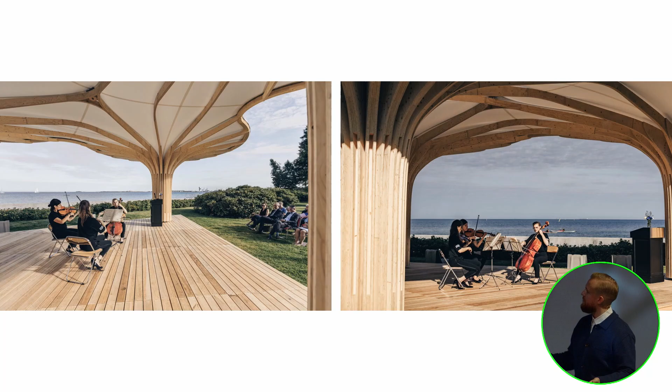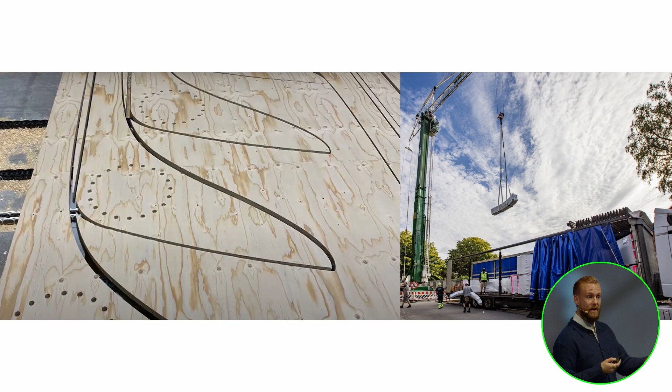An example of this is a recent pavilion that we've just completed for the Swiss Embassy in Denmark, where the project brief was not only about trying to create a pavilion that captured the amazing sights of this location, as well as providing an event space for the many things that the embassy tries to hold in it, but also a way for us to experiment with new digital fabrication techniques, and ways of manufacturing to ship it there so that it can be assembled on site.

Easily, as well as being disassembled, so that we can embody these new biomaterials into our way of working. The second pillar of JAJA is transformation.

And that's because we believe in any project, it doesn't matter if it's a master plan for a new urban area or a building, is that if there's an existing building there, as much as we can, we try and retain it and recreate it within our project. And that's not only because of the climate change aspects.

We want to try and preserve as much material as we can, but also there are unique spatial opportunities that you get in these types of buildings. Depending on the age, they have very unique characteristics in terms of construction, and we don't see that so much anymore. So it's important to try and preserve this as much as we can in the future.

An example of the transformations that we're doing, and one that I think is insanely cool, is we're currently renovating Denmark's oldest castle. It's called Nyborg Slot. As well as the renovation of the existing castle, we're actually putting on an addition to it, which in some ways is an addition because it's a new museum, but in another way it's actually just bringing back the existing gantry wall that used to be a part of this castle.

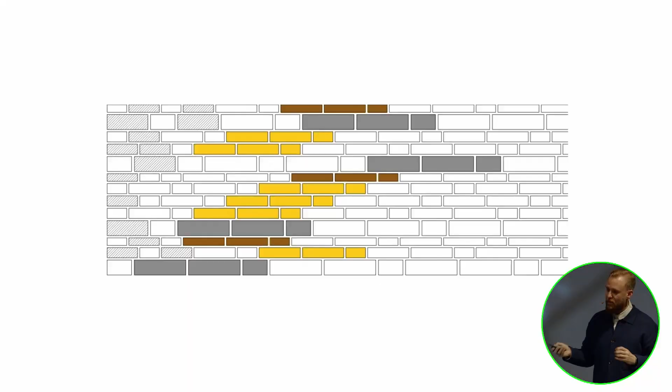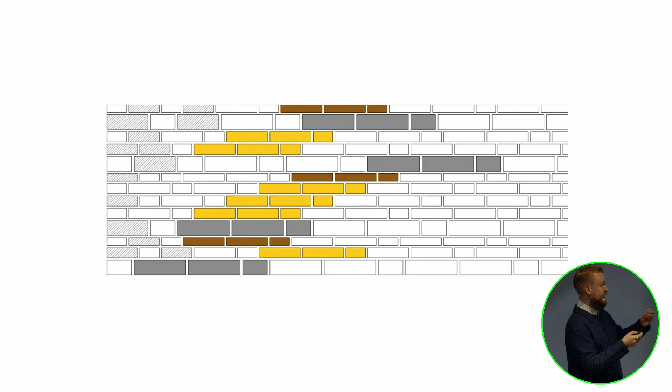One of the challenges for us is how to integrate a new building into this existing context, especially when putting in new bricks, because in some ways we want to preserve that kind of randomness we get in the existing building, but we also need a construction method that our bricklayers can actually follow and use.

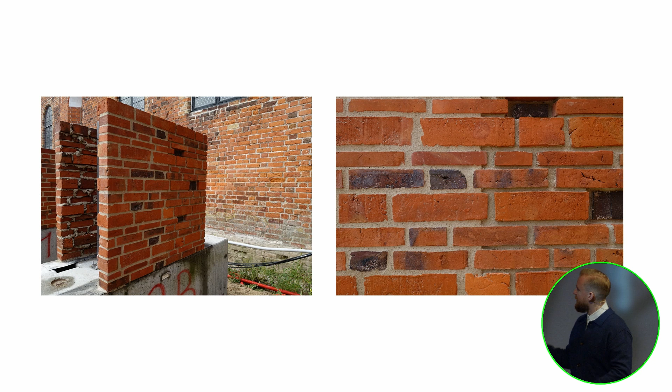So we've been using parametric tools to make these different patterns so that they appear random while still integrating into the existing brick facade. This is hopefully going to come together into a beautifully carved out gantry wall that preserves the characteristic of the old while providing a new characteristic and a new type of architecture.

Okay, the final pillar of JAJA, and one that's close to my heart as the head of mobility, is mobility. I think it's actually a bit weird for an architect to be involved with mobility. It's not really the traditional domain that architects get into.

For those of you questioning what mobility is, for the past 100 years or so, it's been this, the car. If anyone thinks of transportation, they generally think of this, because it's how we move around the world.

And that's not to say it hasn't had positive benefits. Especially over the last 100 years, we've had amazing social and economic opportunities as a society because of the car. The only problem is those initial ideas of independence, of being able to get around, once they hit the mass population and we started redesigning cities to allow ever more cars, it got to a point where you couldn't exist in a city without a car, which is really bad.

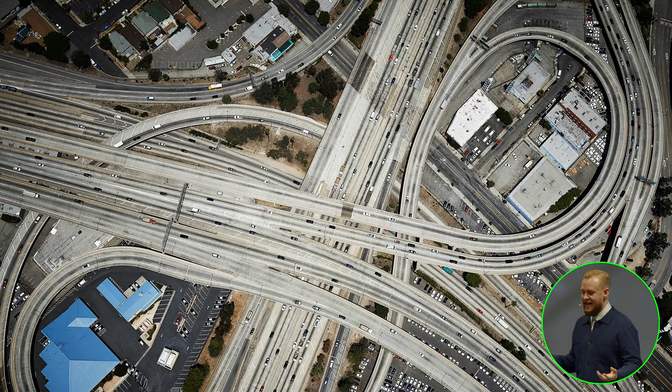As an architect, why I find this incredibly sad is because of the spatial impact these transportation choices have on our built environment. We all know these roads, the way they splinter our urban territories, or even in the case of Prague, the middle of your downtown, you just have this highway cutting through it.

I'm sure it helps people get around, but when you have the National Museum, where you can't actually cross the road at points to get to it because of these ever-expanding lanes of cars, it just gets a little bit sad, right?

The cool thing is, and where a lot of JAJA's thoughts have come over, say, the last 5 years, is we seem to be at this paradigm shift in the way we move through cities and the way we conceive of mobility. In some sense it's come through technological advancements, things like autonomous vehicles, electric cars, but it's also come through the emergence of micromobility.

3 years ago we didn't have electric scooters, and now they're up to hundreds of millions of rides globally. It's not just about personal mobility, but you're seeing these types of vehicles, especially in Prague, things like cargo bikes, being used for logistics. In Copenhagen, you see parents delivering their kids to school on them. It's this crazy new category of transportation coming about.

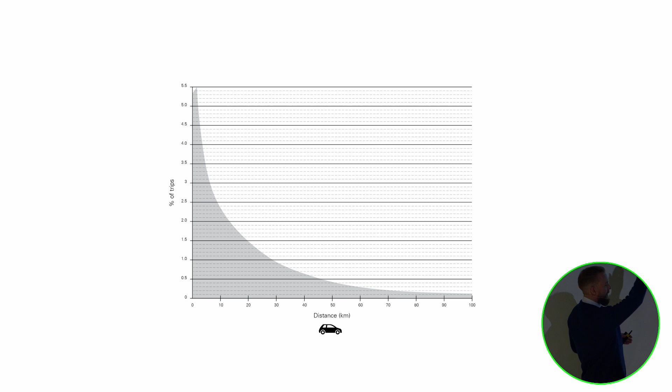And the way you read it is that the bottom axis is the distance, and the side axis is how many trips there are. The world over, the majority of trips are under 10 kilometers. The majority of them are under 5 kilometers.

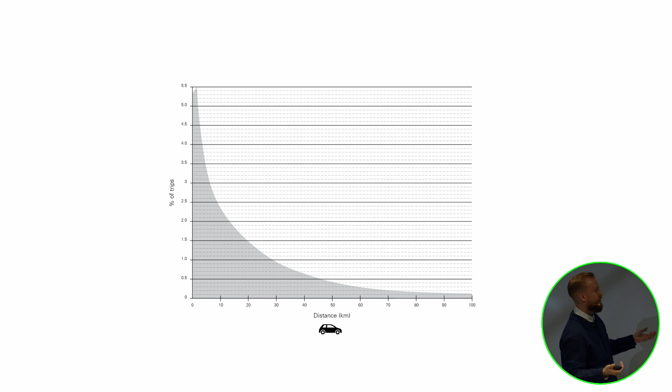An insane amount of trips are under 2 kilometers every day, and yet we buy these cars to service them. It doesn't matter if we're just going to the shops, which we could easily walk to, or driving to another country in Europe. We have this car that's designed for all these trips, which means they make sense for some, but not for a lot of others.

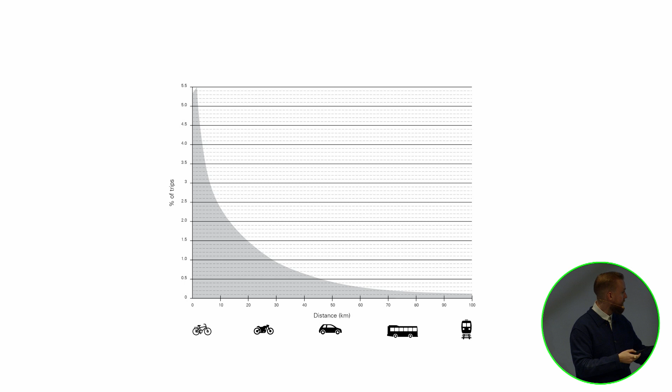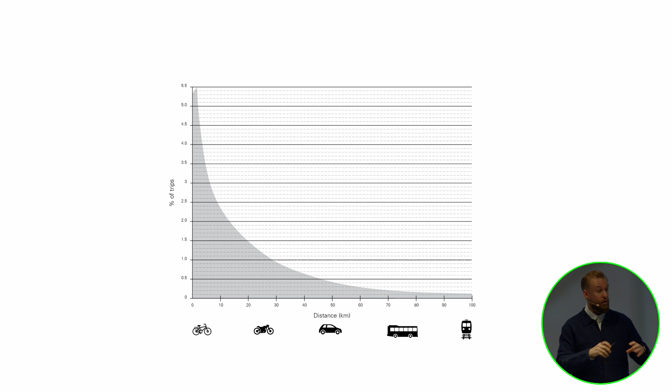But the thing is, when we start unbundling that mobility package, where we have apps that allow us to pick, you know, to have a bicycle if I want to ride 2 kilometers across the city, or a share car if I want to drive to another city in the same country, you can start picking the right mobility choice for that journey. And what that means is we have an overall better, more efficient transportation system.

So it's never about replacing the car one-to-one. This is the kind of discussion where we hear, you know, my bicycle can't do all these crazy things with the car, or the bus doesn't go where I need it to. It's not about these one-to-one kind of replacements of the vehicle, but rather the chaining of all different types of mobility options that are actually able to release us from this burden of private car ownership.

And I get that that was a little bit confusing, and to talk to the general public about this is extremely hard, because if you even mention removing a single car park, or that you might restrict vehicle access in any way, you kind of divide people into two groups: those that love cars and those that hate them. And if we're going to move forward as a democracy, we need to find a middle ground.

And that's why we've been developing this communication tool called the mobility pyramid, to try and broaden the discussion beyond cars or no cars, but rather maybe a little bit of cars and a lot of walking and cycling, and then a little bit of public transportation as well.

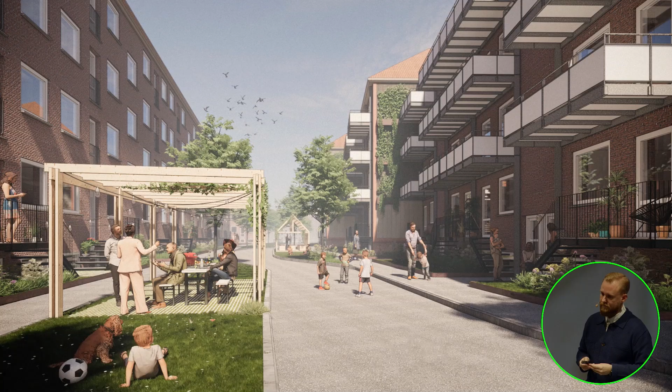We also do pilot projects. This one is in the northern Danish city of Aalborg, where we've taken 90% of the parking away for a year and put in new social functions. That's just to test, right? Is this something residents are willing to give up their parking place right outside their house for?

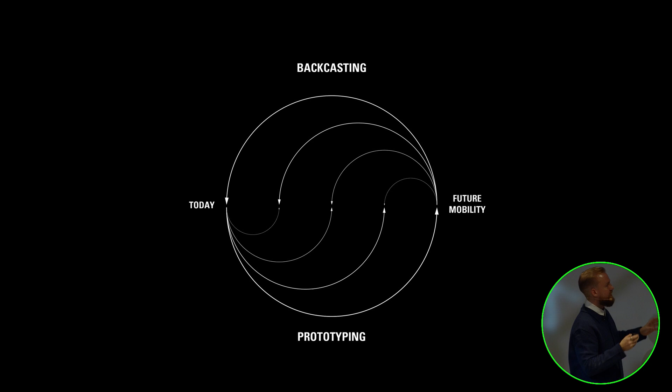So now you can see where the combination of backcasting and prototyping come in, in this kind of yin and yang diagram, where the backcasting and visioning guides our work today, setting the agenda. But the prototyping takes it and gives us the knowledge to re-inform that vision. So it's not a static thing. We're learning every day, becoming more clever, and hopefully making better inroads to actually get to that future step.

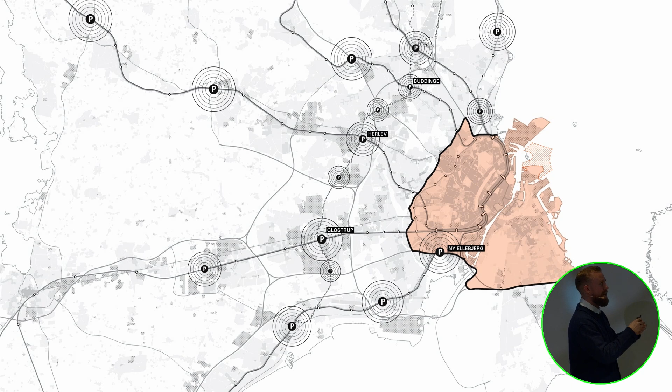At JAJA, what we've been working with is a large-scale strategy, on one hand, to really try and exclude cars from this highlighted red area. But because we can't just create a line and say this is where cars are and this is where they can't, because you're just going to push the problem out to the neighboring suburbs, there are also micro strategies in all the surrounding suburbs so that they can become their own little car-free areas as well, and make shifts to more sustainable mobility choices.

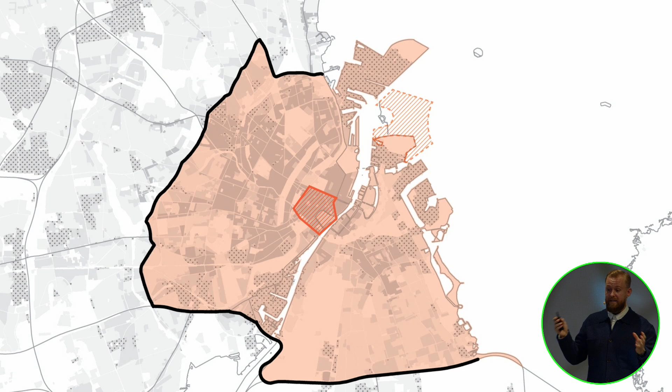So if we start with this overall plan, we're going to zoom in to just this area. For the next couple slides, I'm just going to jump through some explanatory diagrams to explain this. The way Copenhagen's set up right now, just like Prague, is you have these roads that cut through the medieval city center—I'm talking like 7 lanes. It's crazy. It's not how we should be treating this space.

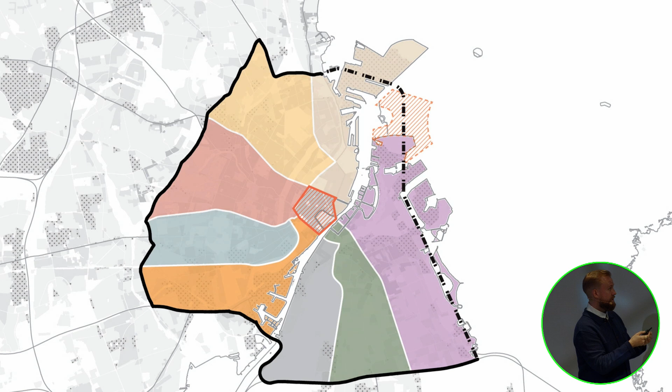So one of the strategies we've been looking at to cut this is to implement a strategy called traffic islands. Any of you in transport might know this from the Belgian city of Ghent. Essentially what the strategy does is divide the city into different zones where cars aren't actually able to drive across them. So you can drive into a zone if you need to get somewhere, but you shouldn't be driving across these zones for trips that could otherwise be made by other choices, right?

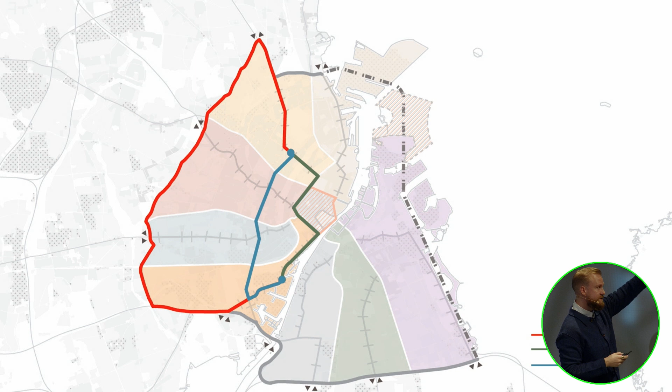To give you an example, you can see here that if you're a car, the red, you would have to leave the zone and come back in and come out. Whereas for bicycles or public transportation, you can just cut through them. So what that's doing is encouraging more sustainable modes because it's the easiest option, while still not excluding cars for those that really need them. It's this way of balancing the priority.

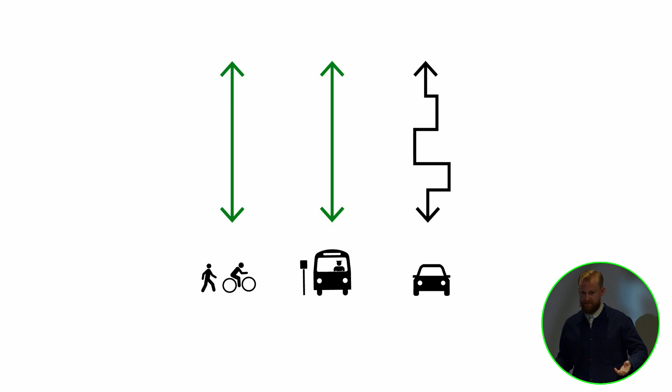In Ghent, this has been extremely successful—they've seen massive reductions in car ownership, people adopting shared cars, and an increase in public transportation, as well as a city that isn't full of parked cars everywhere. But if you're taking mobility options away from people, you also need to provide them with an alternative. It's not simply about taking away cars; you need to provide something else in the same measure. And this was probably a big jump for a lot of people.

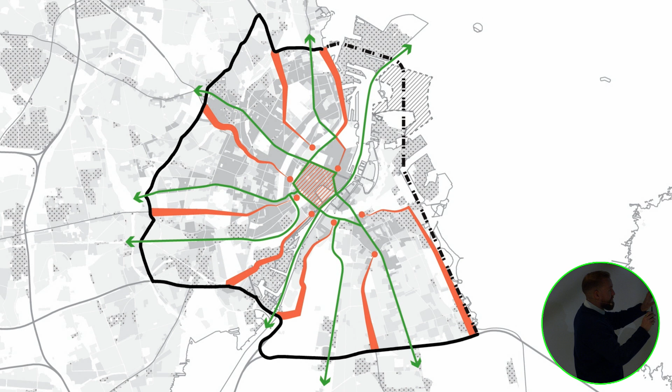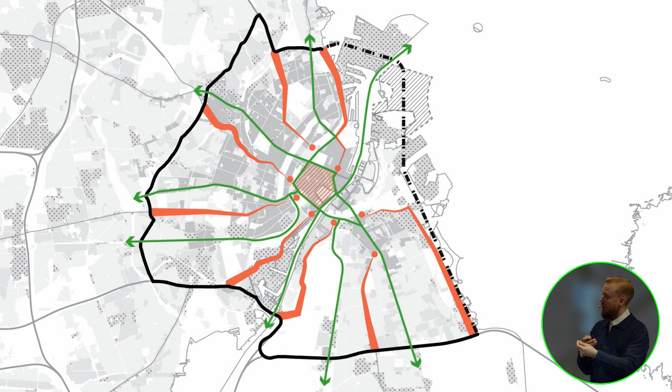Those big red roads I mentioned before, the ones cutting through the city center—what we're proposing is that every second one of those becomes what we call a super boulevard, a high-capacity corridor for public transportation and shared modes of mobility. These green roads really function well because you don't have cars cutting across these traffic islands anymore, so all those intersections on the big roads that were slowing down capacity get freed up to allow this transportation to go through.

To give you an example of this, you can see in the top section of the existing layout where you have 7 lanes of traffic, parking on either side, and then a distribution road to allow that.

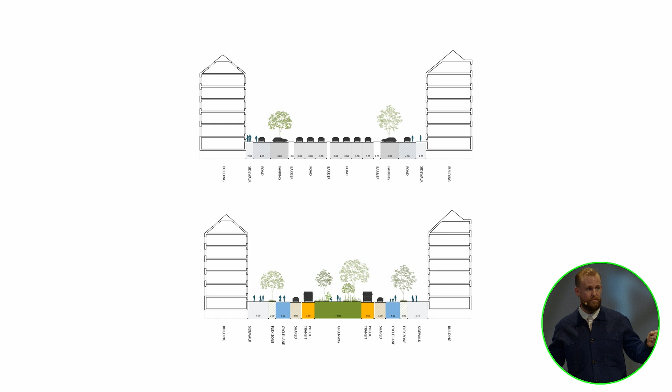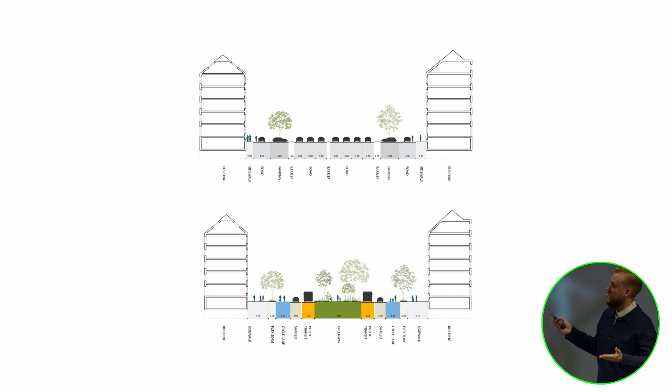That gets condensed into a transit way of either a bus or tram, a shared mobility lane for buses, shuttles, taxis, and then an extended cycle lane to allow more throughput for bikes.

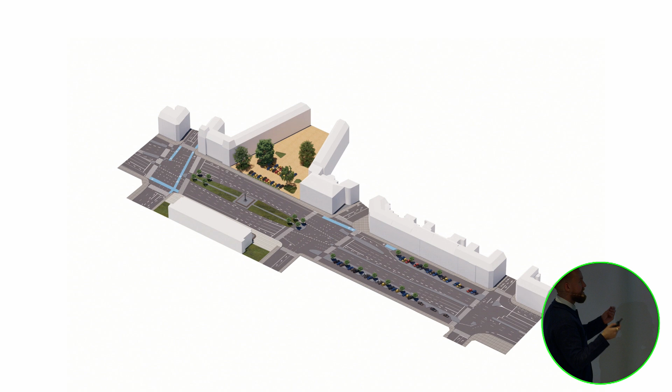This is crazy. This is like the central cultural axis in Copenhagen where you have a number of museums. What this does is take this kind of highway that cuts through the city and transforms it into a new public space, where you still allow mobility in some sense, but actually provide these new corridors of green infrastructure that increase the amenity for pedestrians and the people who live there.

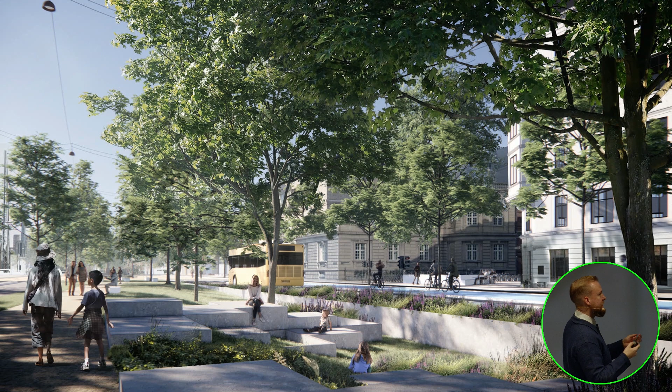It's really hard in Copenhagen because we have so much asphalt that when it rains too heavy, it floods the city because it can't be absorbed anywhere. So we need this kind of infrastructure to absorb all this rainwater.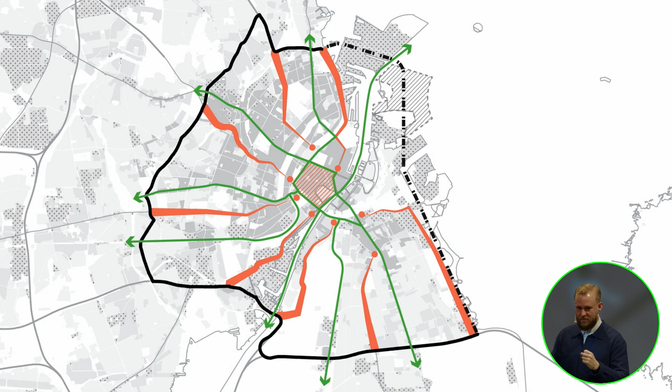But that's not to say we don't think about cars. Unfortunately, even in a car-free strategy, you need to consider car use in some way. That's important because many people rely on it. It's just about thinking how do we do it so it's not the predominant mode that people are at.

Wait, so sorry, if I go back.

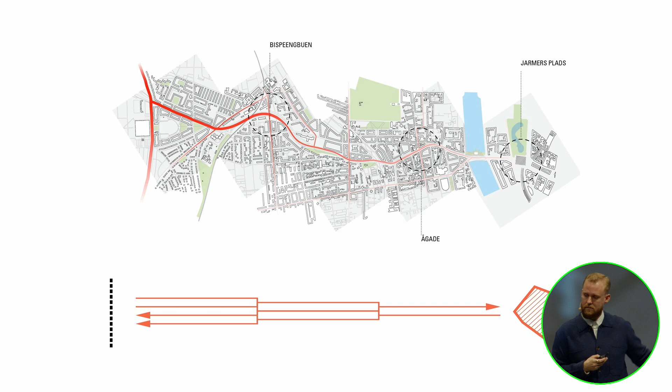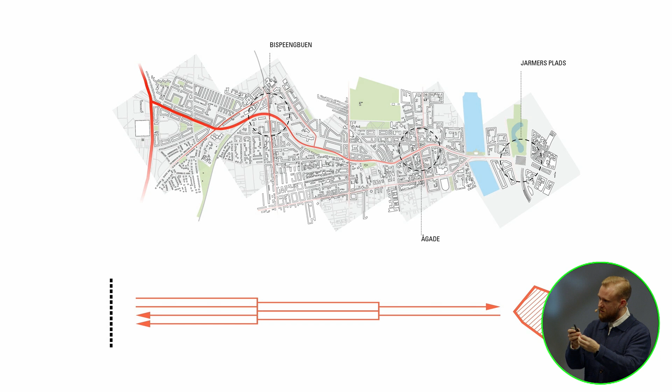Yeah, so these red lines snake in as they're coming towards the city center because people aren't crossing anymore. There's an endpoint where these roads are going to, and that means the capacity of the road, as you go further in, gets smaller and smaller because people are kind of funneling off.

So you can start to reduce the amount of lanes on the road the further you get into the city center, until you eventually hit that kind of stop where you're going left or right.

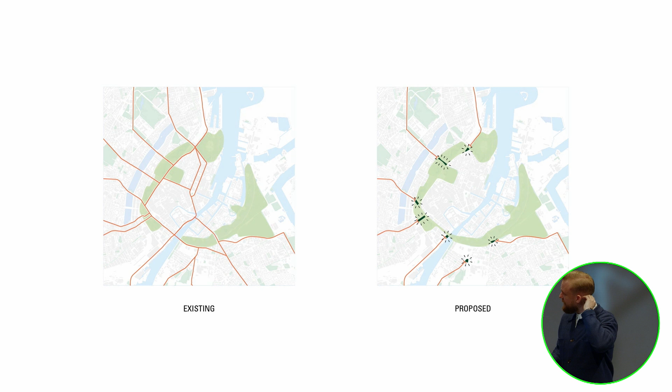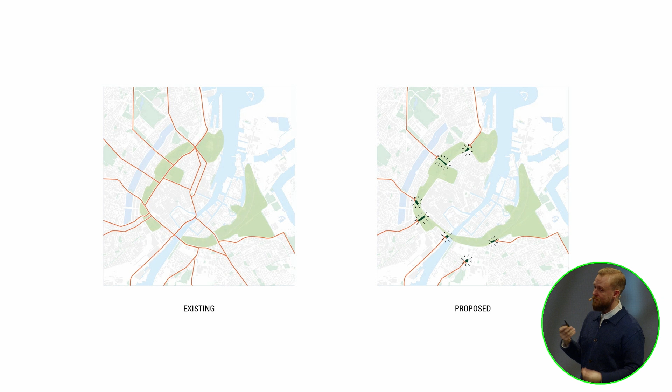What's really cool about this strategy is that these places where the roads are stopping, you can see on the left how they're cutting through the city center and through this historic green fortification that used to run around the city center, these stopping points almost line up exactly with the old green fortification. So you can put in new green urban squares that relink this infrastructure that used to exist.

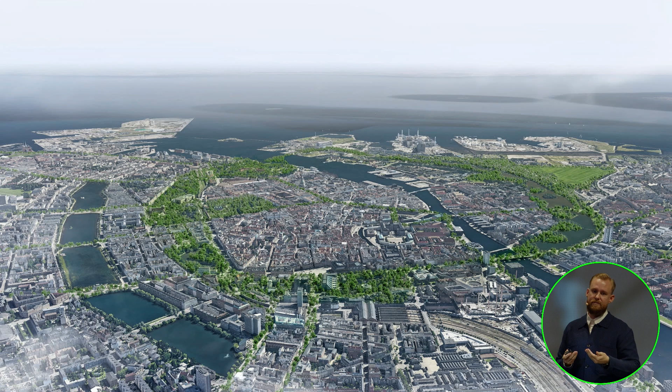In the existing Copenhagen, you can reintroduce these green infrastructures that used to be there. I really like this thought that this discussion isn't just about mobility, it's not just about transport, it's not just about cars, it's about green infrastructure, it's about people, and the many other ways that by rethinking the hierarchy of transportation, we can create better spaces for the city.

This kind of project had two different scales. We've been looking at the arrows on a map and where different things are going. While that's important, it's also really important to consider how this plays out on the human scale.

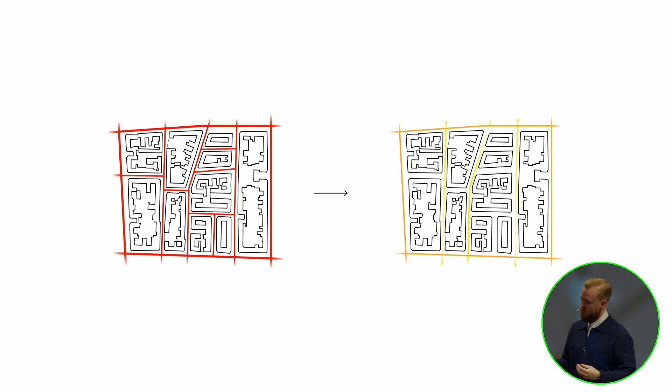I don't know if many of you know the superblock strategy they're developing in Barcelona, where you've got a pretty even grid structure in the city. What they do is make a 3x3 grid people can't drive through, so you can only drive on the perimeter of the grid, but not through the inside.

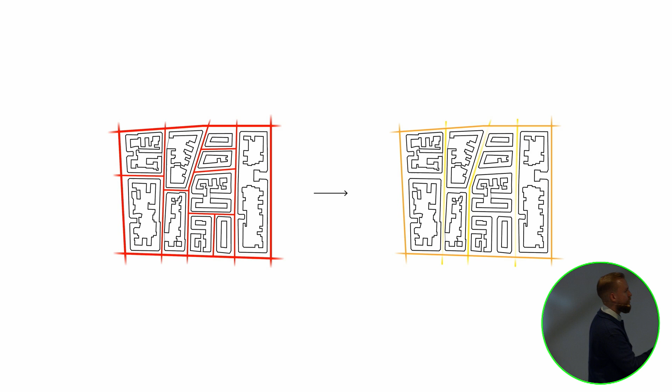We've adopted a similar strategy here in Copenhagen. We don't necessarily have that same urban fabric as Barcelona, but you can still apply these principles, where any cars around these zones can circulate, leaving the inner streets, the living streets, generally free of cars.

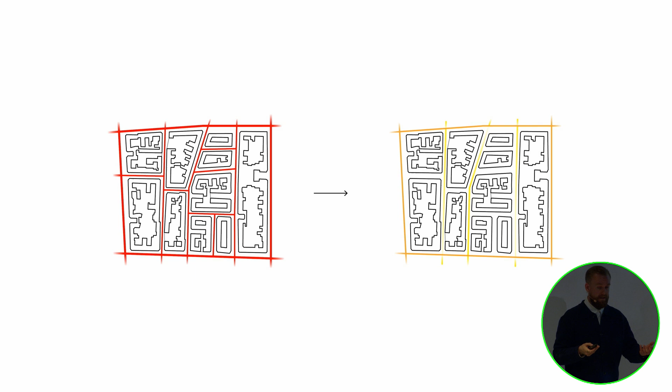To give you a sense of what this looks like at an urban view, you can't necessarily see those grids appearing. But when you apply the principles of the superblock, you can see how circulation happens around the streets, on the bigger roads that can absorb it.

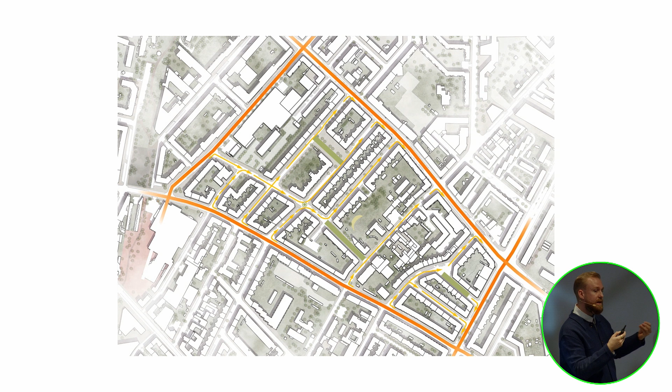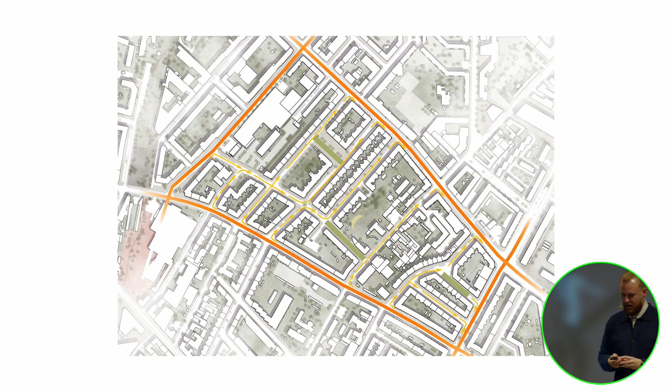While you make the inner streets one way, you can route them in different ways so that you can create more space for other purposes on that street. Now within this strategy, I showed you the green and red streets.

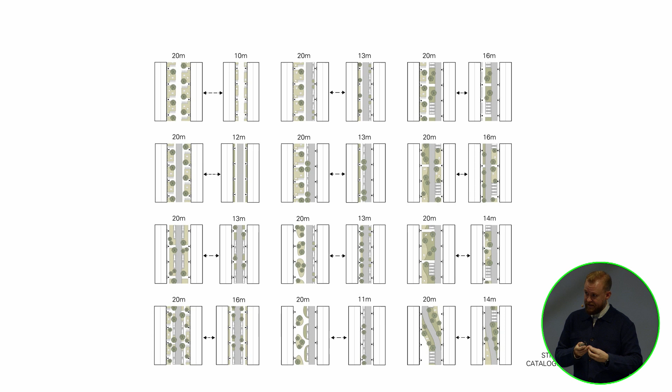There's maybe 16 of them in total, but if we're talking about the living streets in Copenhagen, we're talking about thousands, so you can't really design each one. What we were interested in is developing a catalog of approaches that could be taken to individual streets, varying on street width, orientation, and ground floor functions.

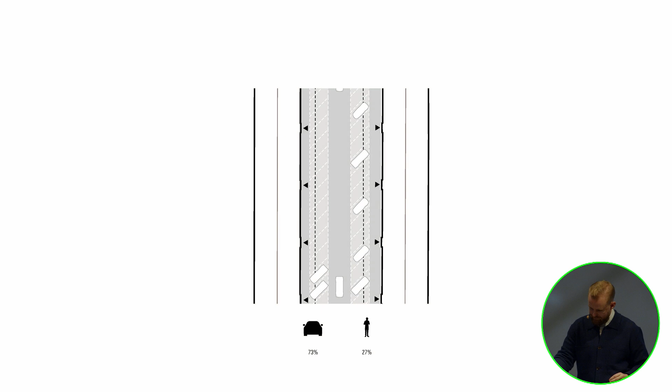I'll step you through one of these proposals to show how you arrive at these streetscapes step by step, and show you the considerations.

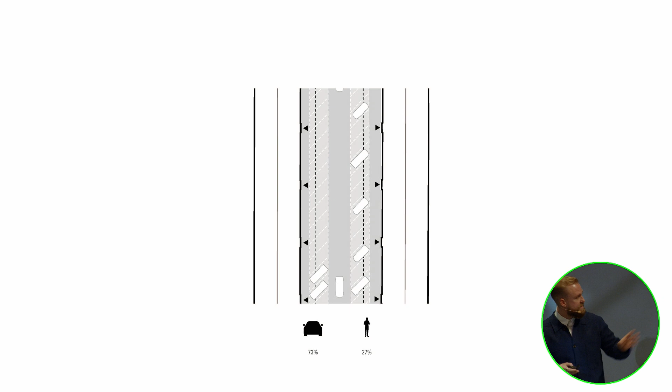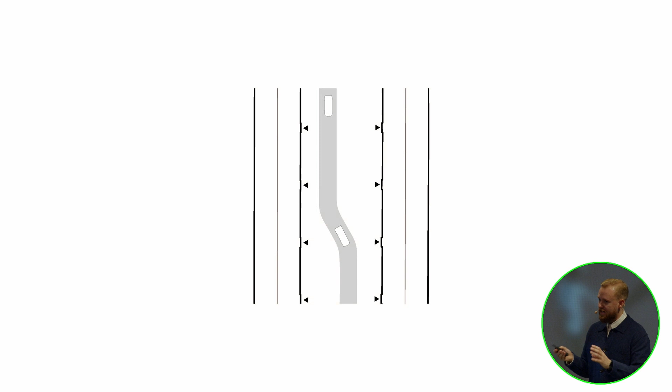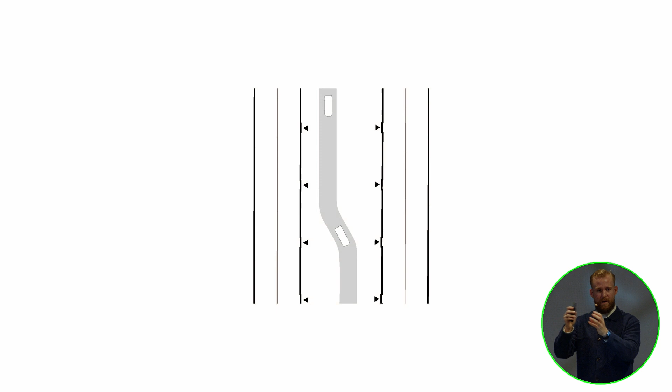So this is the existing street, where the majority of space is given to cars. Our immediate thought, since we're in this new car-free area, is to allow a street in one direction of 5-meter width, allowing a car to travel one way and a bicycle to go either direction. Because it's a shared space with excess room, we start putting bends into the street, which slows cars down naturally, since a variety of users share the space, while also mixing up the space allocation on each side for a more interesting spatial response.

We then allow pick up and drop off, so people can receive deliveries, tradesmen can come to do jobs, elderly parents can visit - we still allow aspects of cars within it. But one of the big moves is to provide gardens to the ground floor apartments, because these are traditionally the least desirable apartments since they don't get as much light or a balcony, so they have no semi-private space.

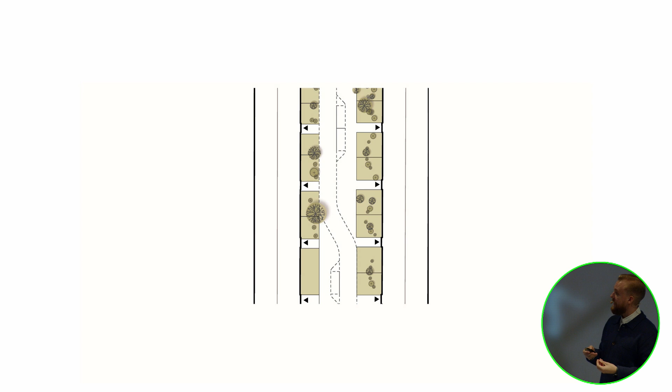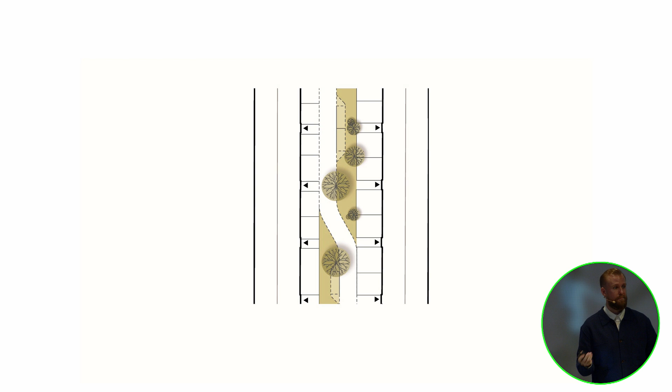These gardens provide an offset giving some semi-private space, and also audio and visual privacy for people no longer walking just outside their apartment window. We also provide new social functions, social amenities, and urban nature into the street, so it's not only for some people but for all people, bringing them out onto the street. These steps turn this from a street for only cars into what we call a living street, with multiple functions existing within it.

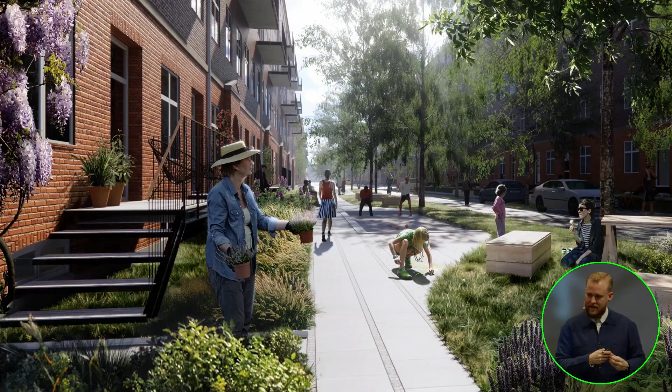And what that does is take this existing street I described before, and we imagine it becoming something like this - where you can see there are still some cars present, but they're not the dominating feature. There's much more space for people to come in, and much more space for green infrastructure.

Primarily, I think these images start to shift the conversation a little bit away from 'do I have to give up my parking space' to 'what do I get if I give up my parking space.' You can start to play with these trade-offs and show people that maybe there's a better use of our public space.

Cool, so now we're up to the second theme, which is from parking house to urban space. This has emerged through a project you probably know of ours - the Konditaget Lüders parking house, the Park and Play, located in the northern harbour, a new urban development in the north of Copenhagen.

If you notice, there's place for trees, place for bicycle parking, because it's all been accumulated within that building. It's a funny little side story that it was built there, because these new residents obviously wanted a car space, and it was designed so it was no more than 200 meters away from the apartments. But because of that little inconvenience and really great public transportation infrastructure and bicycle networks, it's underutilized. It's not full of cars because people have chosen not to buy one even though they have the option to do it.

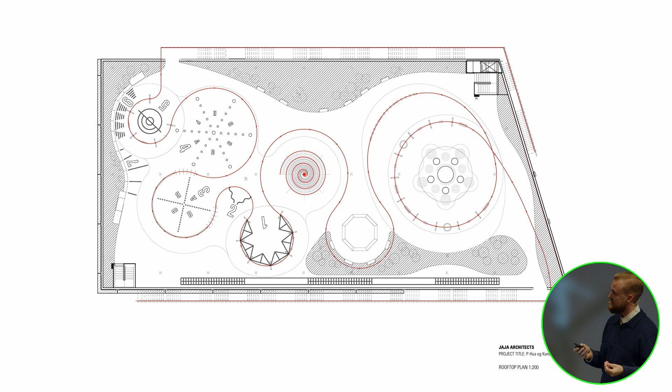It was an interesting project because we were inspired by the kind of red brick and red tile of the existing industrial area before it was transformed into this new urban development. So to continue that red thread, we literally made a red thread that would connect from one side of the building to form a number of different scales of spaces that are recreational for, say, playgrounds, kids with families, urban spaces for visitors, but also recreational facilities for the local CrossFit club.

This red thread, what it did is—this is a public space on top of a car park, six stories above. So you need a way to bring people up to that space. This first element of the red thread was this grand staircase, inspired by the Centre Pompidou in Paris, leading up to the urban space that I think people might know.

You can see here how the red thread is containing and forming all these different uses within it. It's kind of like the framework for the rest of the building to work.

So as I said before, the red thread forms these different types of spaces for all the different user groups, whether that's the CrossFit guys that love it—there's a little timer so you can run up one stair, do all the exercises, and get back down—to all the families and kids, because you don't have playgrounds like you do in other areas, to just people coming and hanging out, getting a coffee and a pastry and enjoying the view.

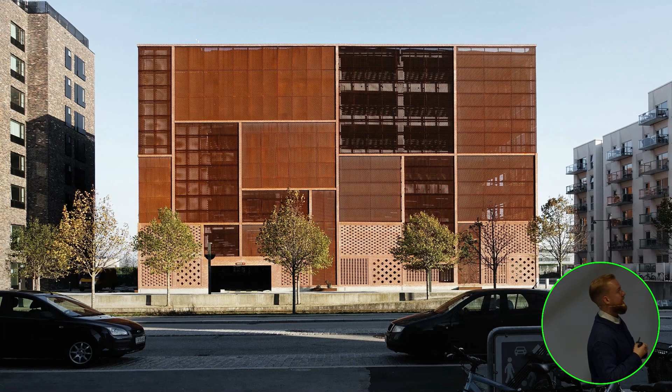The next project is another parking house that we've done, this time in the south of Copenhagen. And while this wasn't so much about creating a rooftop public space, it was about how these kinds of buildings can still provide urban qualities on the ground level.

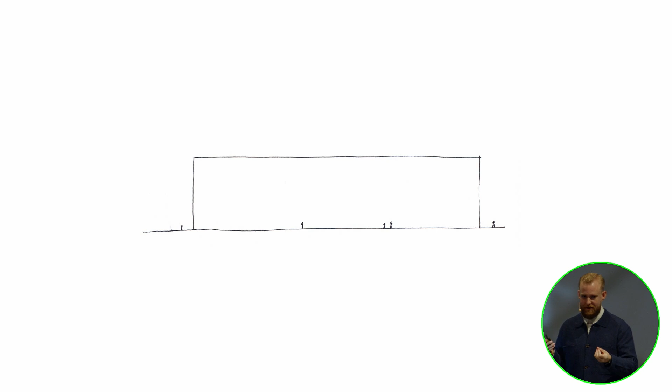A big challenge when designing these types of buildings is that they're essentially one volume with no program. So a lot of our task was how do we break up this giant mass into a human scale that can address people as they're walking along it. We were inspired by the artist Mondrian to produce this very strict grid structure that would dissolve as you move further towards the base.

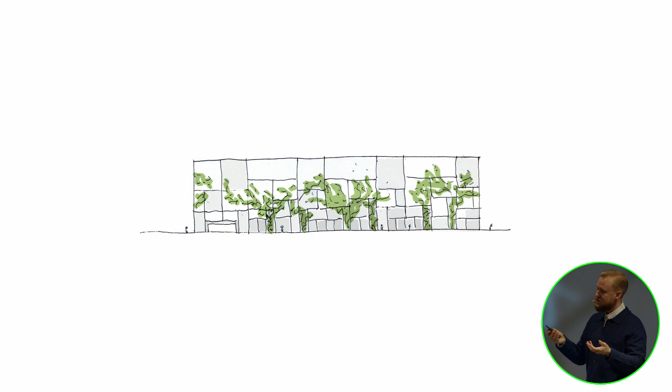On the other side, we were planting these green planters that would rise up, so you'd have this nice intersection of the organic planters rising from the bottom and the strict grid of the facade coming down from the top.

Materially, we kind of separated the building into two functions. We have this plinth, which is addressing the human scale, built out of brick, with various brick patterns that relate to the pattern of the facade. And then as you rise to the top, we have the corten steel with these bigger spaces. What that means is that as you're moving along, this building doesn't feel so big—it actually addresses the human scale quite well.

And the brick actually allows you to carve out different niches to provide maybe not big programs, but important amenities such as benches for people to sit, and little places for you to park your bike. So these buildings should also be contributing in some way to the local surrounding, not just taking away.

The final theme I'm going to talk about plays out with these parking houses. It's been a development, right? Because it might be a bit funny for me to get up here and say we need to get rid of cars, and then show you a lot of parking houses, which is a big part of our work. A very important thing we need to consider is that we have a need today and an ambition for the future, and there's a long transition period between it. I don't expect no cars tomorrow—we need to do this in a sensible manner. So we need to think about how the buildings we're designing today can be flexible enough to still sustainably meet those goals for the future.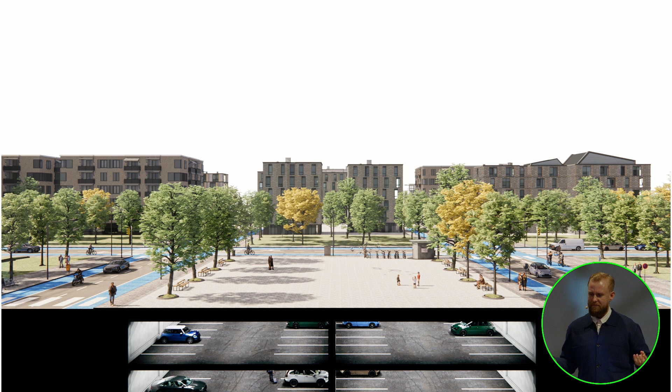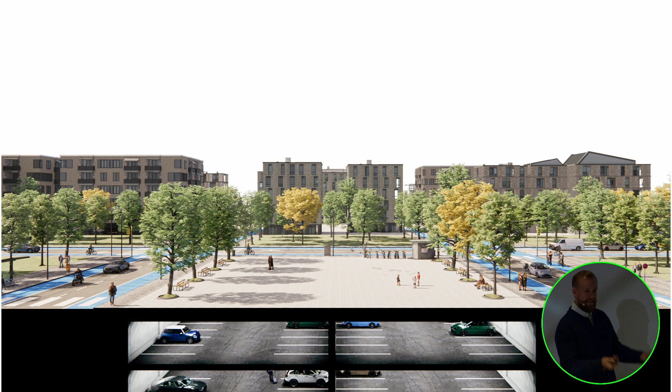So I'll give you a rundown of what I think parking houses are. We have the underground parking basement, which is prevalent in so many new urban developments, because the thinking is: get rid of the cars, and everything looks nice on top. But if we're thinking about this transition, these structures are incredibly unsustainable because they cost a lot, require a lot of energy to build underground, and you have to excavate a huge amount of soil. Afterward, they essentially can't be used for anything else. So if we're changing and moving to other modes of transportation, we're just going to be left with basements everywhere.

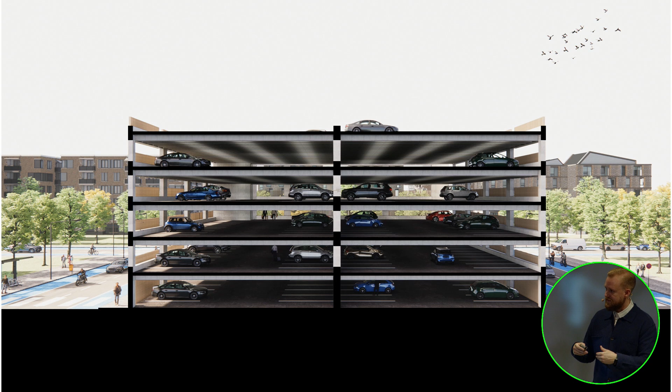The next typology is the above-ground, standard, cheap parking house that you all might know. I'd say it's maybe a little better than the basement, but it's essentially going to be destroyed if we were to change how we move around. With these structures, you have very deep bays and very low floor-to-ceiling heights, so you essentially can't do anything with them—you can't get the daylight required to convert it to another program, and it doesn't give you the space to do anything nice with it.

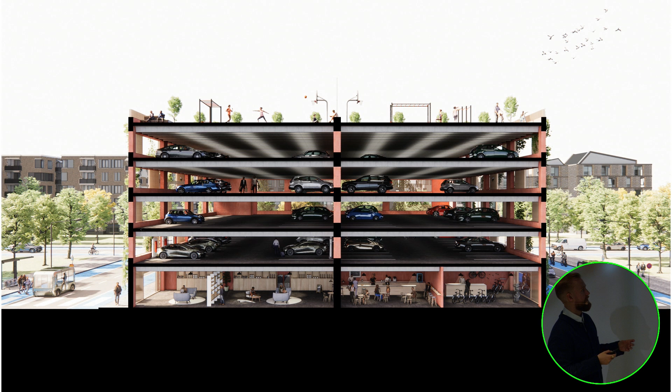The next is our red parking house, Kondi, which we love but are still a little critical of. Although it provides this amazing urban space on top, and has ground floor amenities that contribute to the local area, it's still built out of steel and concrete. So if we're moving to a future where we want fewer cars, this type of building is going to become obsolete. For the last two years, JAJA has been trying to develop a new typology of parking house that's built out of timber.

I think what's really cool about this building, and the thing you'll notice initially, is that the bay structure is set up differently. Because we're using a different building material, we have a different type of construction method, which means we can start to design this with flexibility in mind.

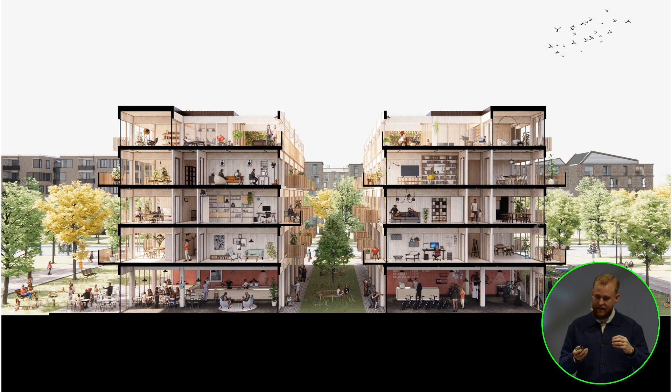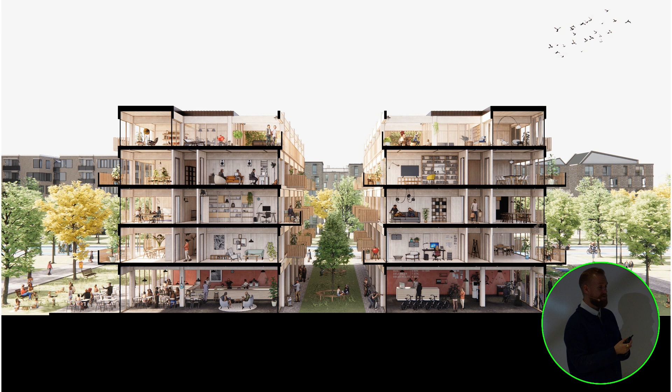Because of the timber and the way it's being put together, you can actually start to remove it and think of new flexible uses for it in the future. So in this particular example, it's not only going to be used for housing cars, but as we hopefully transition away from cars, we can start to change this into housing by removing some of these bays so that you still have the adequate depth to allow adequate daylight. You still have the floor to ceiling height in order to put in new program. And what's really cool is developers really like it because they kind of double up — they can make money on the parking to begin with, and then take a little bet that if they want to do something else in the future, they can. So it's this kind of little insurance policy that you can put in.

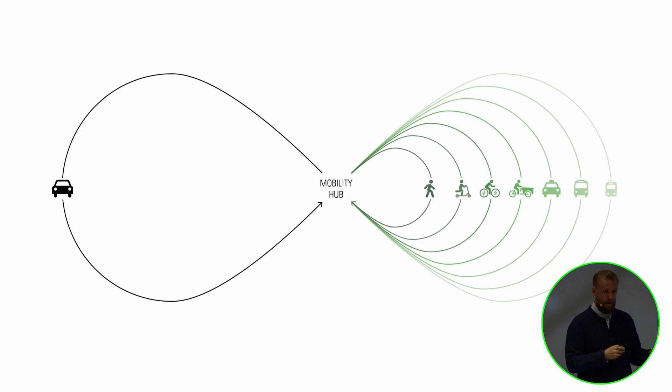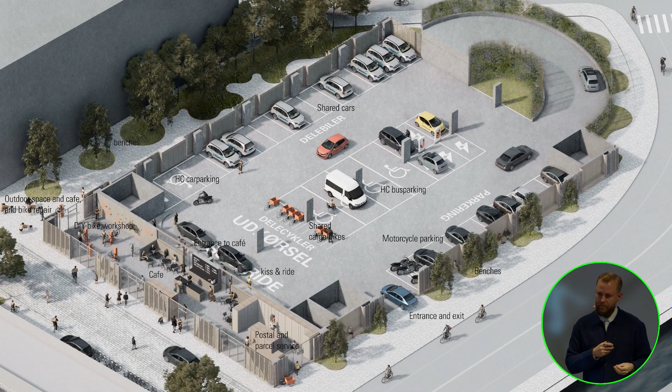Where we're starting to see most success with this type of building technology is in Norway, because they do a lot in timber there. And where I think we've also tried to embrace this idea of flexibility is not only in the structure, but also in the program. So we're starting to move away from calling these buildings parking houses and towards mobility hubs, because a mobility hub is much more interesting in that you can start to use it as a way to transition people away from using a car all the time. It doesn't only have to house cars, but can house all types of mobility options — options that can really be suited to the type of journey people are having. A lot of this work is really about the ground floor, so that you can create space for shared cars, charging infrastructure, shared cargo bikes, but also programs that support it — like bike workshops, little logistics centers so you can transfer packages from large vans to cargo bikes to go around. It's really about thinking what types of mobility should actually be in these and allowing for it.

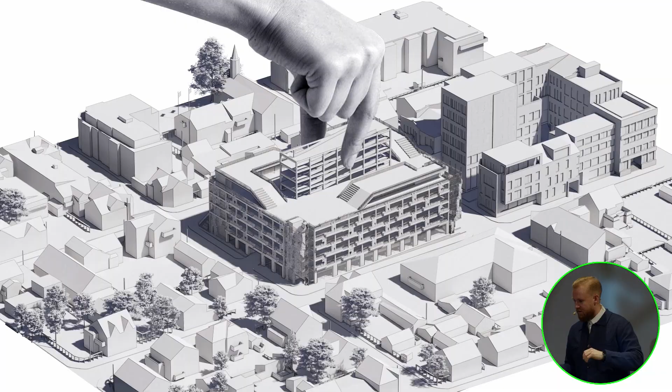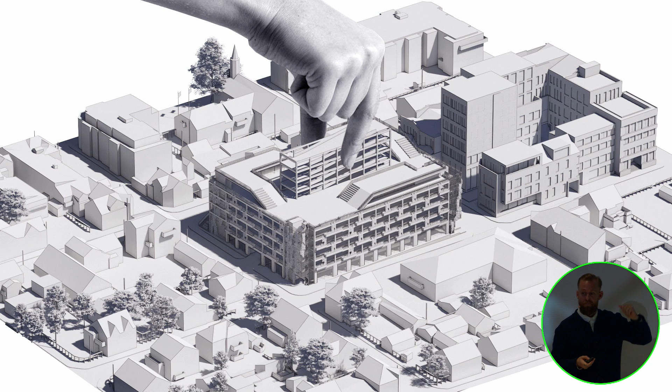The cool thing I've said before with the transformation of these buildings — in this particular parking house in Norway, the way we designed it is to have the access ramp that you might traditionally have on either side actually in the middle of it. So that when we start transitioning away from the need for cars and can go layer by layer, floor by floor, converting it into other modes, we can actually just start removing the central core, because that allows a nice little courtyard. So then you start getting daylight on either side.

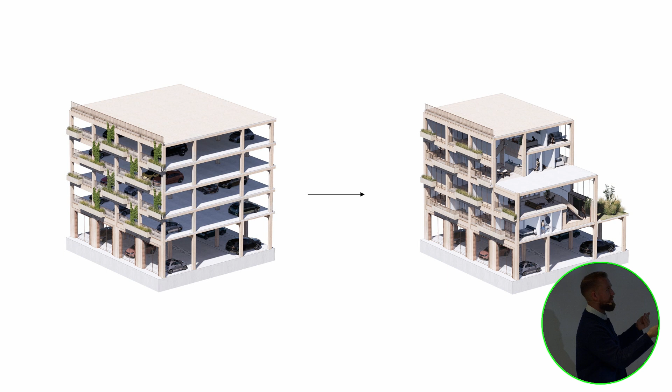I can show you in this diagram how this system is essentially working. On the left-hand side, it's kind of 5 meters, 7 meters, 5 meters — that's the way you structure it with parking on either side. And then you simply just take one of the 5 meters away, so then you have a 12-meter depth apartment with a nice little balcony.

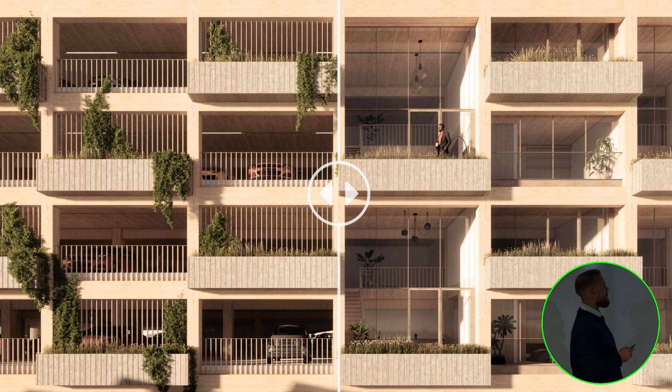The way these apartments work is kind of like a little Tetris, a little zigzag, where on either side they're getting these double height living room spaces while being connected to bedrooms on either side. It works this way as a little Tetris game as you go through. And I think, yes, cool — it worked.

I want to really end this talk with this image, showing the transition of this building from 100% parking on one side to these new types of apartment dwellings on the other. The reason I want to end with this is because I want to inspire you a little bit — even if you enjoy this mobility topic but feel a little disheartened by the way cars are embedded in our society, there are ways to rethink the typologies of buildings we're using and how they can be used to actually promote a green transition in the future. I think that's really where the power of the architect in this whole discussion about mobility and transportation lies, because we can use our spatial thinking to inspire others to go a different way. And with that, I'll say thank you.